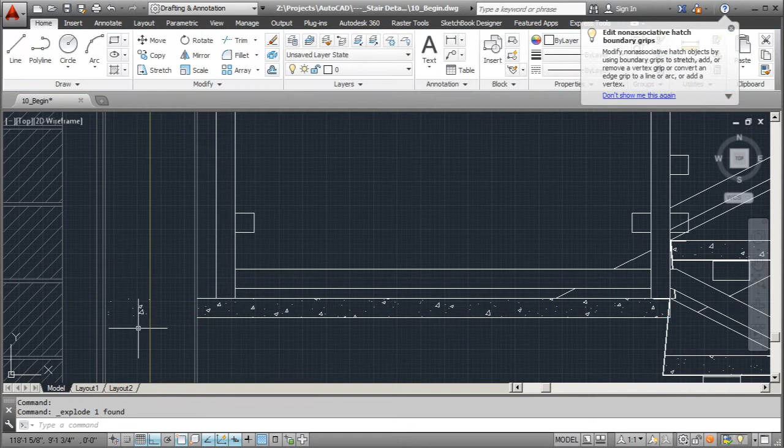We're going to have to explode this in order to get rid of this. So I'm going to go to Home, Explode, this dimension. Let's get rid of this. So that's cleaned up nicely. Looks like we have one more line we could probably stand to trim off.

Alright, and I'm going to come up here because I did a little bit of deleting earlier, and it looks like we kind of messed up on some of this stuff here. So we're going to go Hatch, and I want AR Concrete, 1/2 inch. Bingo. We'll go ahead and place that, but that needs to be on its proper layer. Let's make sure we get that right first.

So now we'll go Hatch. We'll go 1/2 inch. And we'll place it in there like so.

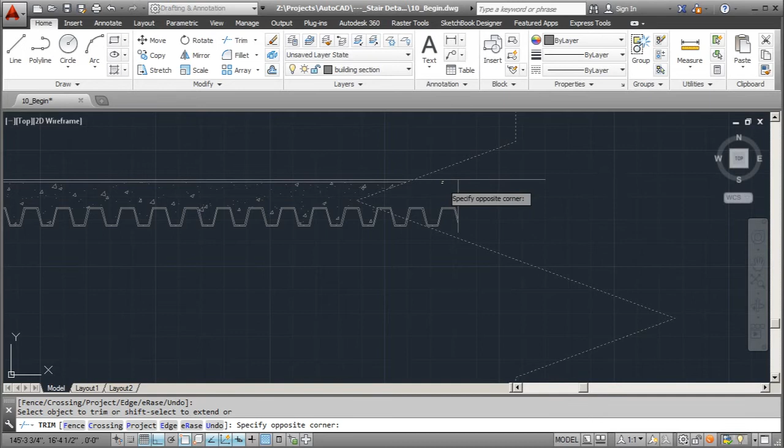Alright, and then we can trim off this area as well. So I'm going to select our break line. We'll go Trim, and we'll trim off anything that we can beyond this break line as well. Cool. Alright, so that's looking a lot better.

So now we can actually go in and start doing our hatching. Now, to do our hatching, it's actually pretty simple. It's exactly what you think it is. It's just going in, hatch, and placing the pattern where you want it.

In these areas, it's pretty easy, but when you get to areas like this where we have some overlapping, we're going to have to come in and hatch in this area. It's going to take a lot of extra steps to get that hatching and create that effect that this is actually in front of those steps. So to do that, I use polylines. I'll bring it out away from my drawing, hatch it, and bring it back in. And I'll show you exactly what I'm talking about.

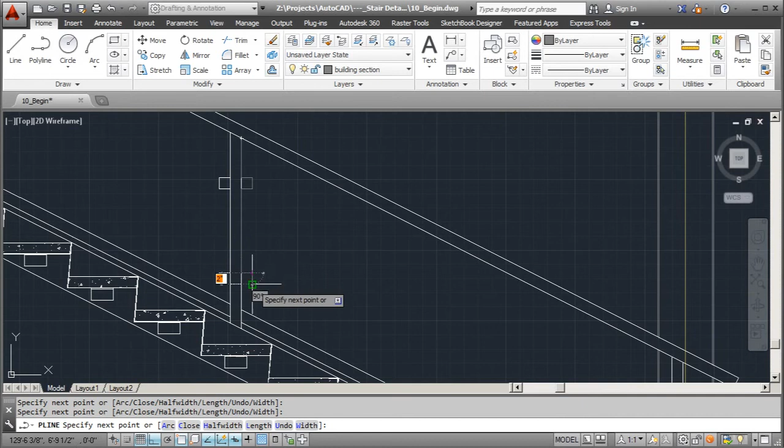So what we'll do is we'll go to Polyline, and we'll start here on the bottom. We'll start easy. I'm going to use my start point there, and that's probably the hardest point of this process, is remembering your exact start point and clicking in the right spot. So I'm just going to make sure I'm doing all of those.

And then once we get this in place, you can see that my line's gray. I just need to make sure that I place this on the right layer. So we'll put that back on layer 0 once we get our polyline completed.

Perfect. So I'm going to grab that polyline. Let's assign it to layer 0 really quick. So now I'm going to grab it, move it, hatch inside of it, and we're going to go with maybe a dot hatch. And we could probably stand to up that, but got to make sure we're on the right layer, of course.

Now we can go hatch. Dots. Let's see what the scale does for us. That works for me.

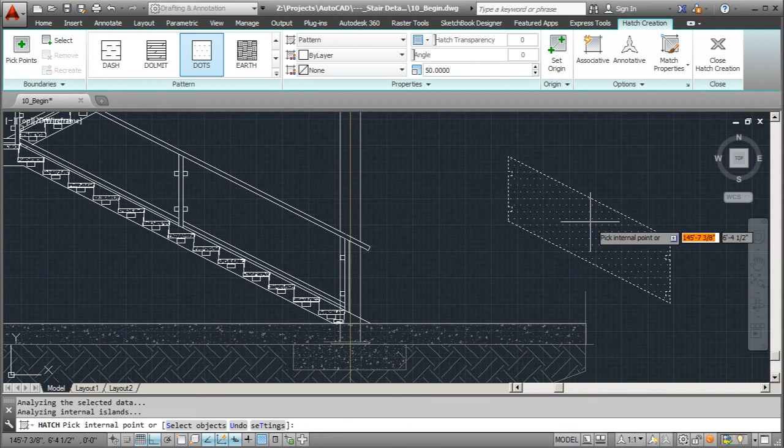Alright, so we can now grab that hatch pattern as well as that polyline. And the key is grabbing it at the right spot and placing it back into the exact spot. So that's how you go about getting that done. So now we could take the exact same approach and do that for here, here, and here. Probably don't have to do it for here. I'm probably just going to hatch in here while we're here.

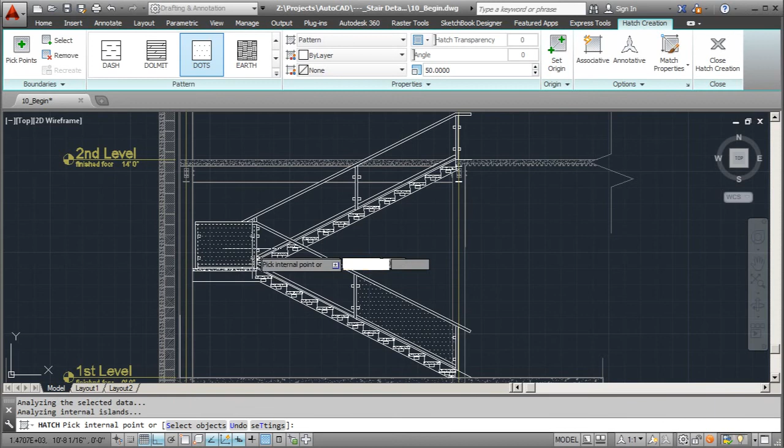That's a lot of heres. But I'm going to go ahead and finish these three panels out, taking the exact same approach. That way the hatch pattern is definitely in front of our concrete here, as well as anything else that's in this one as well. So once I get these complete, you'll actually see that complete in the next lesson.

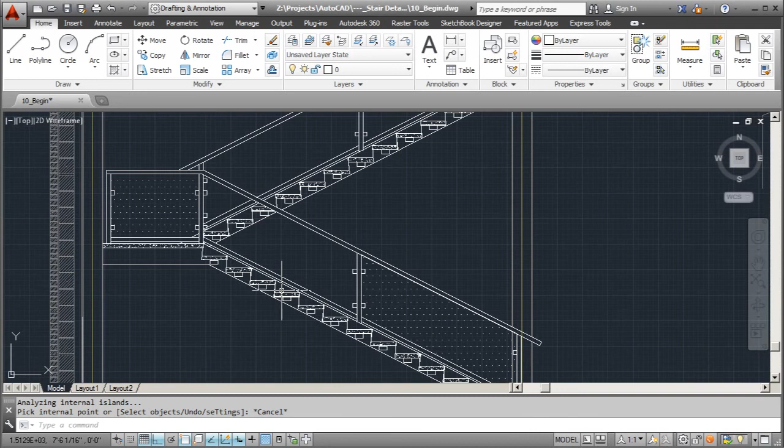We'll start adding text and some dimensions, and I'll let you know which dimensions you're going to want to call out and which ones they're going to want to see when you're taking out your building permit.